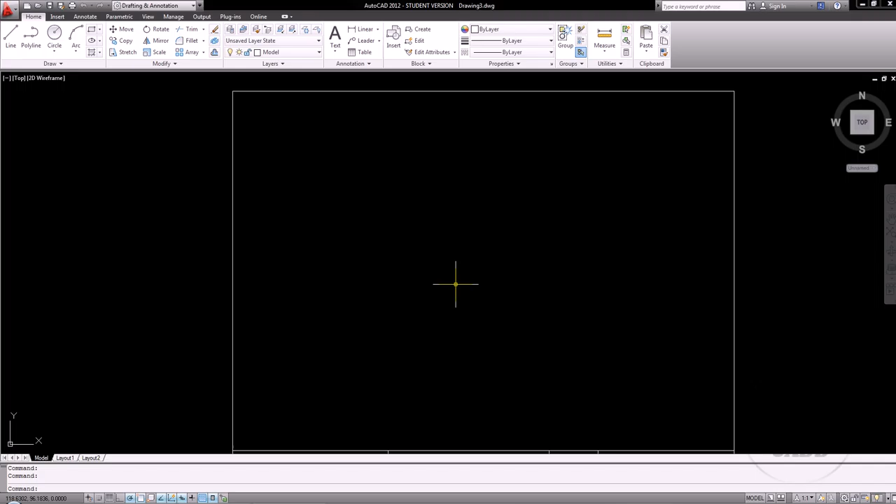For exercise 5-23, I've already started my metric file, and I'm just going to begin by drawing the front view. I need a line that goes across 100. From here, this is going to go up 15. This will go in 30, up 35, over 40.

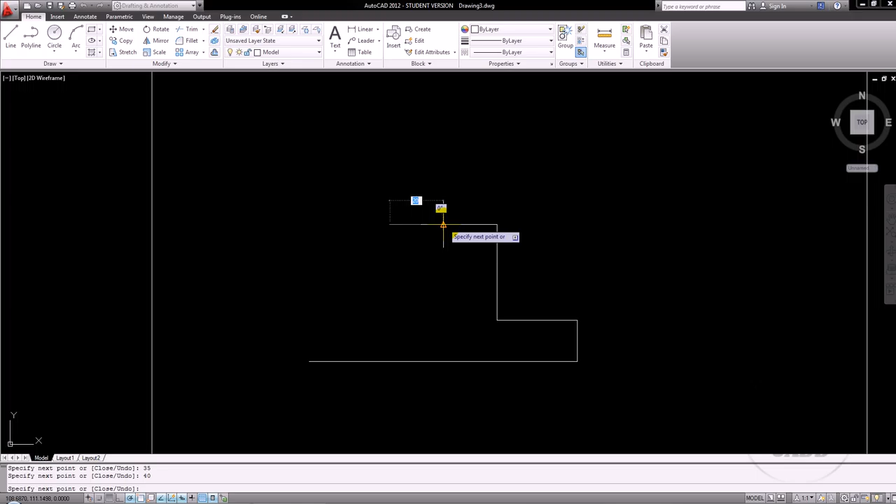Then it will go down 20, and then I can just draw out the rest of the block. I also have a gap in the middle that is 20 centered, so I want to come off of here. If the whole thing is 40 across and that's 20 centered, that means it's going to be 10 over from here, 15 down, 20 over, and then back up.

So this, for the most part, is my front view minus any of the hidden lines that I'm going to have for this particular piece. I'm going to draw my rectangle to set my view spacing, which again is going to be 25 by 25. I'll draw a rectangle off of that. That's going to be a negative 100 by 50, and that's going to give me my top view.

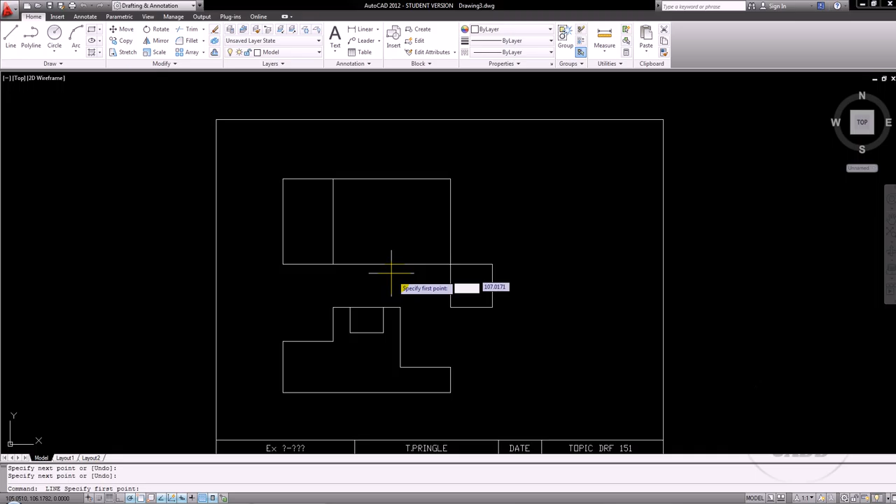I can then take and project the lines that I have for my top view. So we'll project this one here up. We'll project this one here up. I am going to go ahead and put in my miter line for this particular one. And then I'm going to draw a rectangle representing my right side view, which in this case is going to be 50 by 50.

I can now take and draw and project this line here across. That is going to be the only visible line in this particular view. I now need to locate my holes, which are not centered. They're actually offset 13 from the side. So I'm going to hover here, move to the right and type 13, enter. And then since I want to place this by diameter, I hit D, enter, and then 20, enter.

And what that does is that gives me my offset of 13, and it says both sides, so I can now take and mirror this right around the center point of this object to get my other hole. My last hole is actually centered on that top face, and it has a diameter of 30. So I can now take and project everything down that needs projected down, but these are all, for the most part, going to be hidden lines.

And again, I'm going to change my hidden layer to yellow so that you can see it, but I want you to leave yours blue. So now I just project all of my hidden lines right down to my front view. There is one spot on this drawing that is going to become very tricky as far as the hidden line layout is concerned, and that's going to be in the right side view.

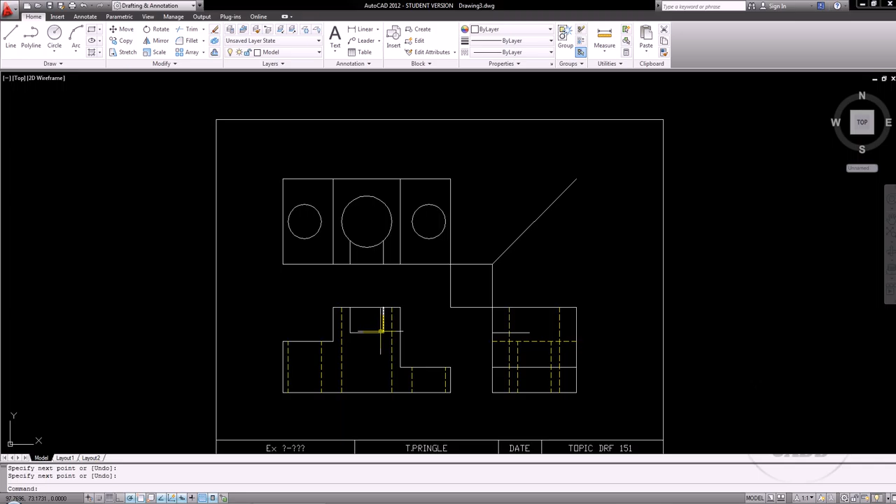What's going to be different is this one right here, because this actually doesn't exist up at this point. So I want to take and just project a hidden line into here, or a regular line into here. Now what that's going to do is show me where this front gap is going to intersect with this, and then projecting this line is going to show me how deep that is going to be.

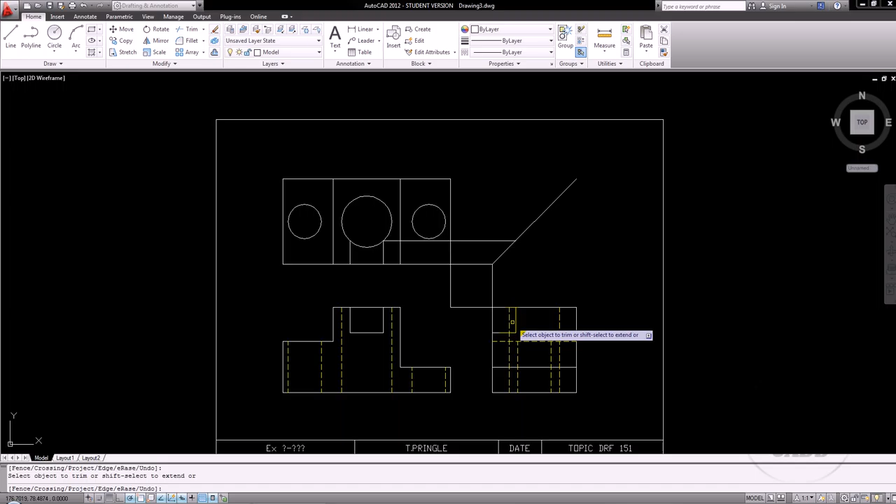So now I've got my 3 lines that I need to trim out, and this gets trimmed because that's where the hole no longer exists. I can erase this, and then these 2 lines are what become my hidden lines for the top of that hole. So this now becomes the hidden lines to show this face over here and where it goes back to actually intersecting with the hole. This is the completion of exercise 5-23.

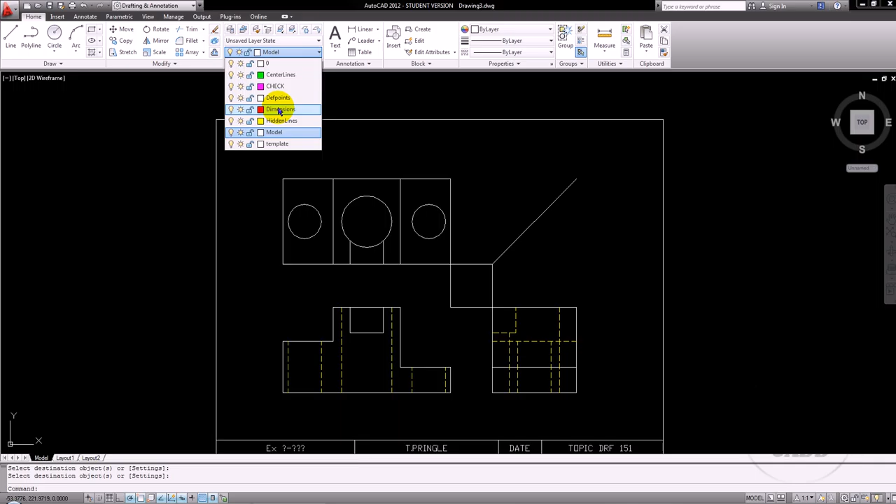The only other thing you may want to do is put in center marks, and again, to do that we go to the annotate tab. Well, first let me switch to the dimension layer, and then I can go to annotate, click dimensions, click center mark, and then go ahead and click the circles, and I'm hitting spacebar in between to go back into my dimension center command.

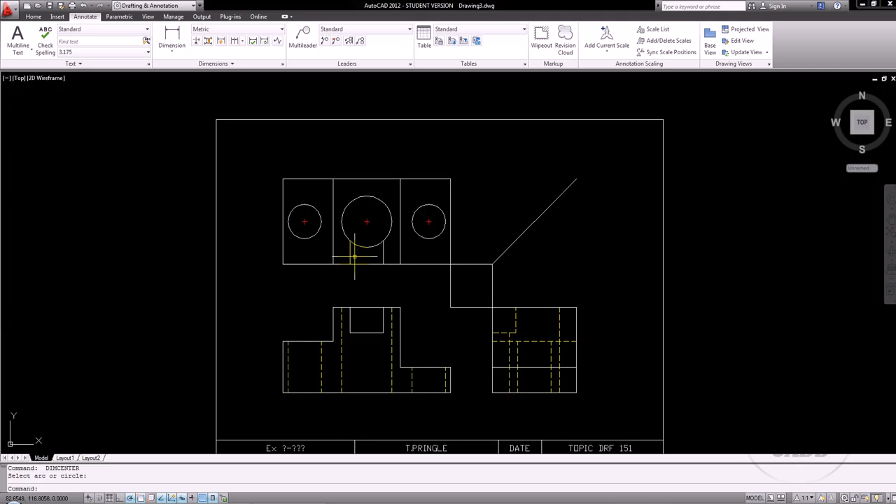But other than that, you don't really need to put the center lines going down through here. This object isn't really all that complex, so we can look right here at this view and see that everything is done. So again, once you get to this point, go ahead and center up your views and put all your dimensions on, and then you can turn in this particular drawing.